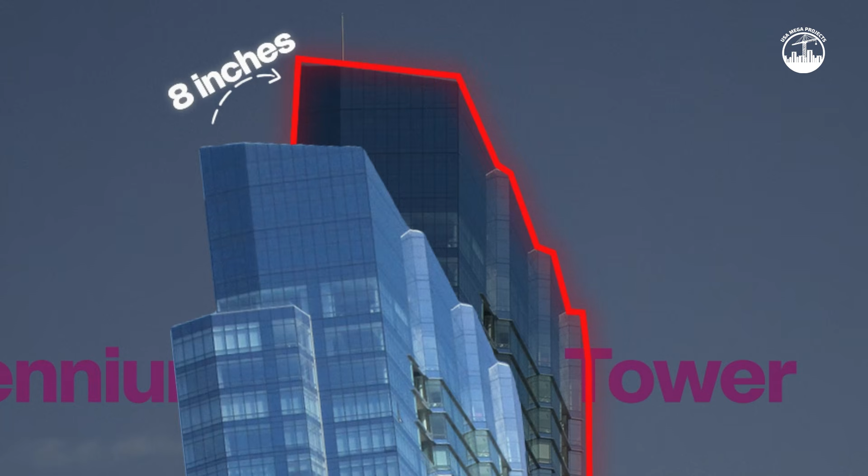Before Millennium Tower was even finished, it had already sunk nearly 8 inches. Not after a storm, not after an earthquake. Before construction was even complete, engineers had predicted 4 to 6 inches of settlement over the building's entire lifetime. It blew past that number before the first resident moved in.

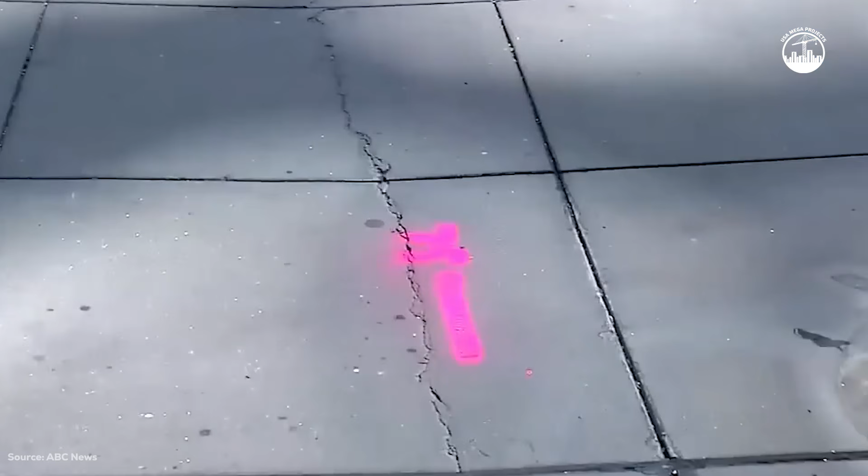58 floors, $350 million, San Francisco's tallest residential tower. And it was sinking faster than anyone wanted to admit. This is the story of the skyscraper San Francisco cannot stop sinking, and the invisible layer of mud nobody saw coming.

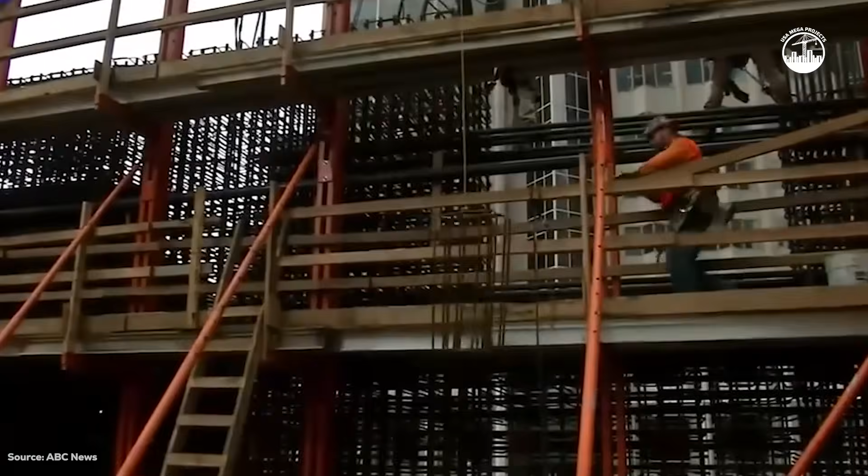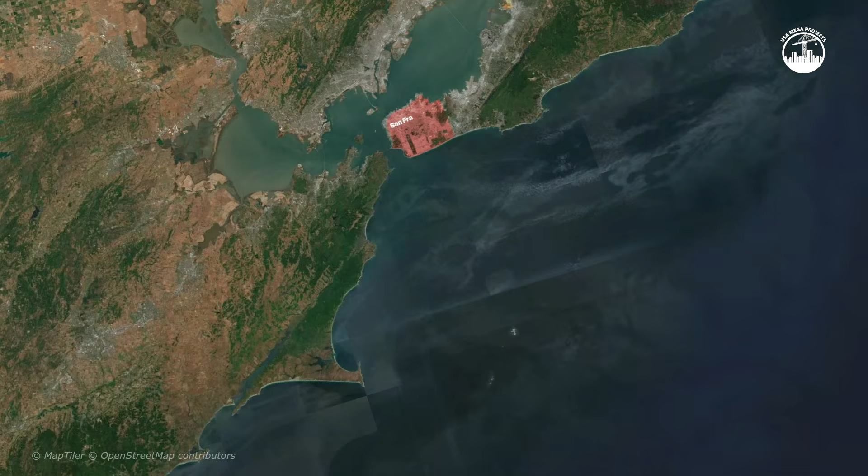When Millennium Tower opened in 2009, it was everything San Francisco wanted to be. The tallest residential building in the city, 301 Mission Street, in the heart of the financial district. Condos started at $1 million. Penthouses sold for $10 million. The building sold out almost immediately. Celebrity buyers, tech executives, even an NFL legend, former 49ers quarterback Joe Montana.

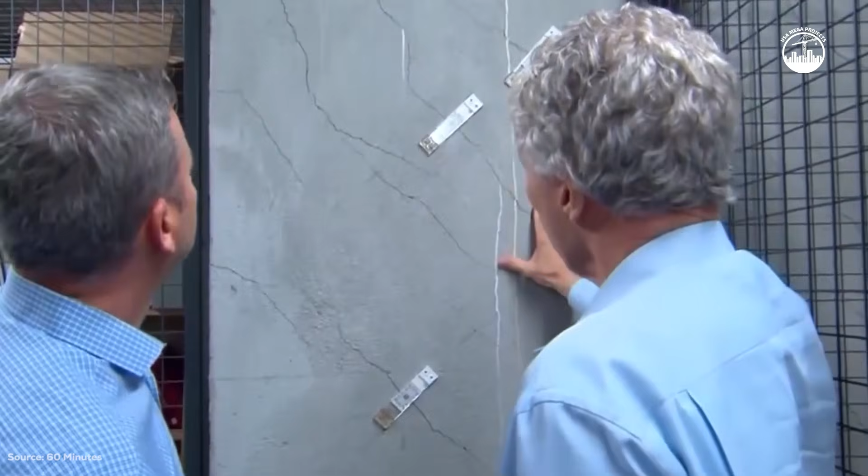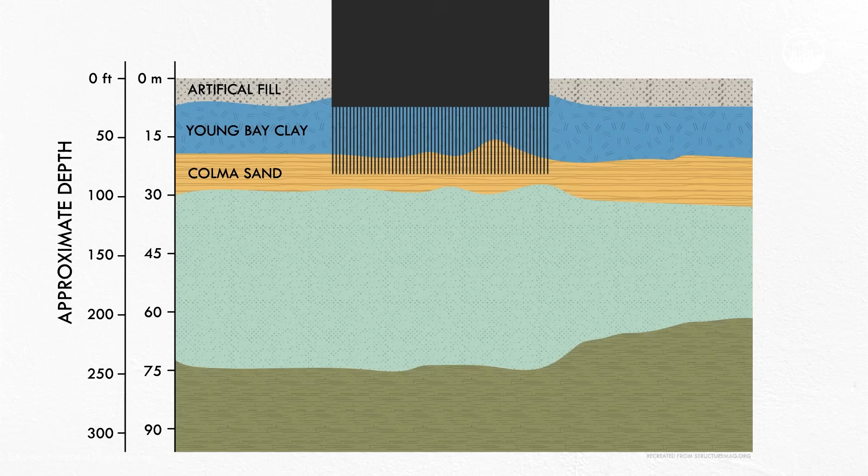This was not just a building. It was a statement. San Francisco was booming, and Millennium Tower was its crown jewel. Nobody knew the crown was already sinking into the ground beneath it. Instead of reaching solid bedrock, engineers stopped nearly 100 feet short. They believed the layers beneath the building could carry the weight on their own. One layer proved them catastrophically wrong.

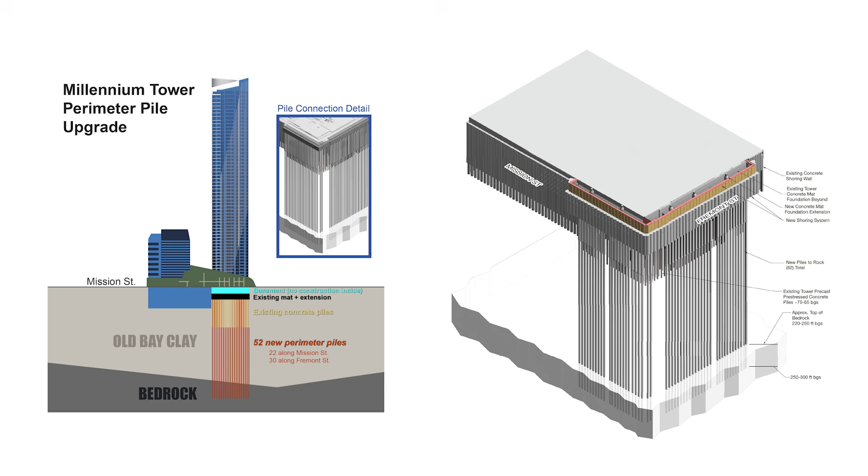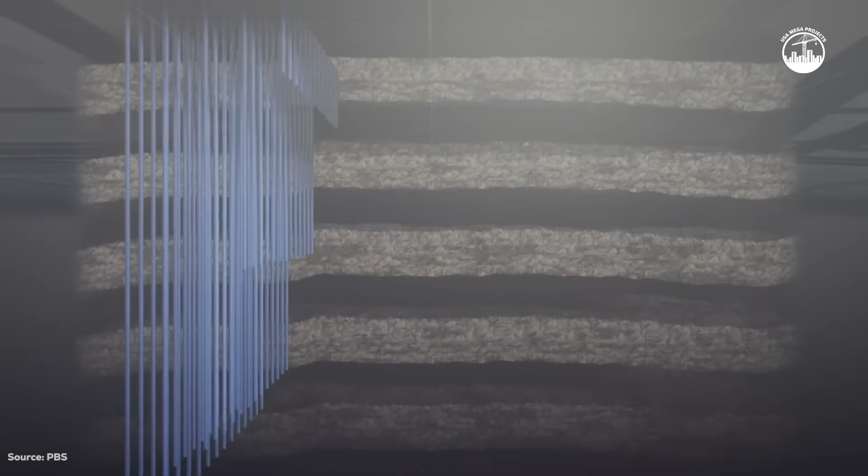Geologists call it the Old Bay clay. Ice Age mud, deposited at the bottom of an ancient bay, compressed over 10,000 years. Engineers built 950 concrete piles into the sand above this clay, never reaching the bedrock far below. The original report predicted the clay would compress slowly, settling the building 4 to 6 inches over its entire lifetime. They were wrong. The design had pushed the clay almost to its breaking point, a threshold where soil stops gently settling and starts collapsing. Any disturbance could tip it over.

By the time construction finished in 2009, the building had already settled nearly 8 inches. For 7 years, the tower kept settling. Outside, almost nobody noticed. By 2016, settlement had reached 16 inches. The building was leaning visibly toward its northwest corner. And here is what residents did not know.

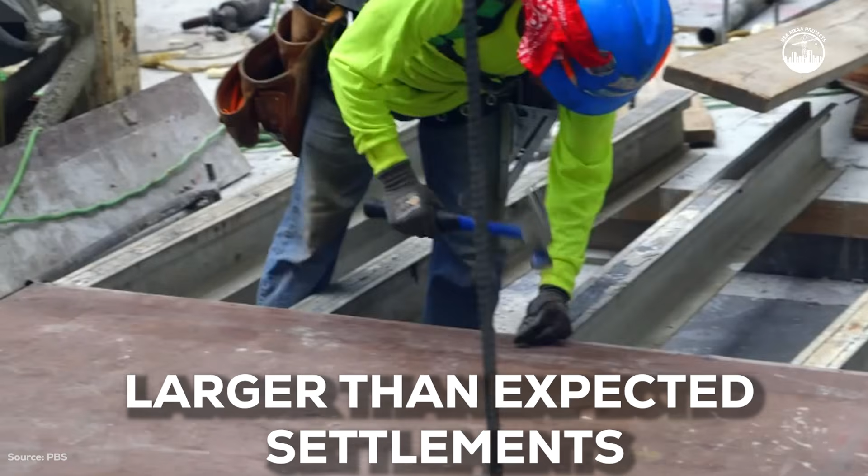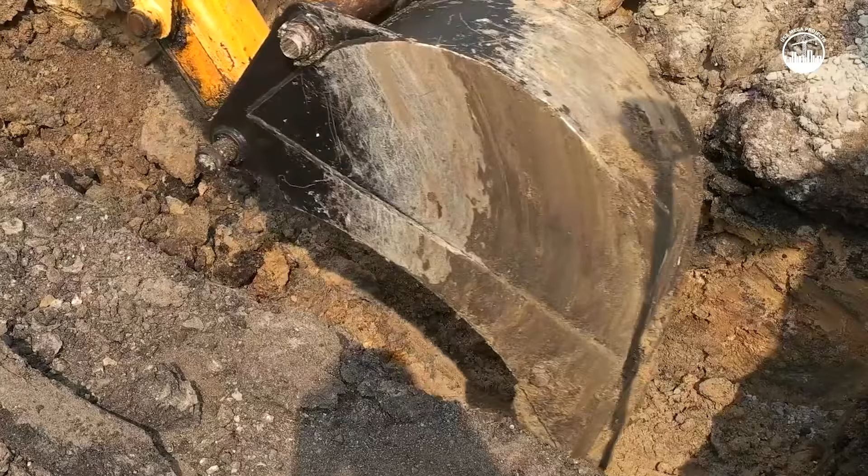Leaked documents later revealed that city building inspectors had raised concerns about larger-than-expected settlements in February 2009. Before the building even opened, both the city and the developer knew something was wrong. Neither made it public. Homeowners found out not from a disclosure, but from a lawsuit. The developer blamed the city, pointing to dewatering from the Salesforce Transit Center built next door. The city blamed the developer for stopping the foundation short of bedrock. A $200 million lawsuit followed.

And here is the question. I want to know what you think in the comments. Building inspectors knew about the sinking in February 2009. The building opened anyway. Nobody told the buyers. Who should be held accountable?

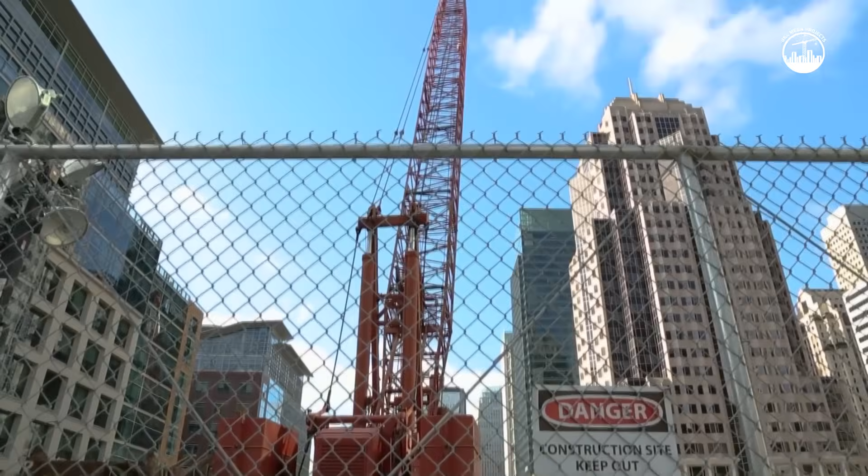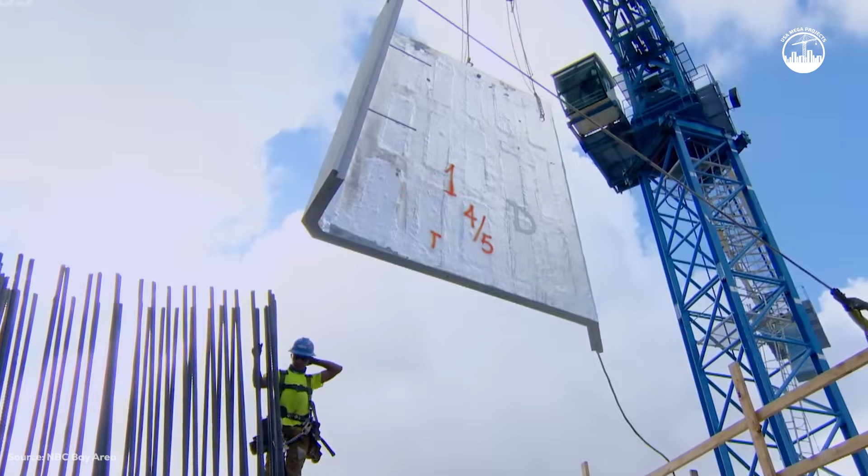In 2018, a plan was announced. 52 new steel piles, driven 250 feet down through the Old Bay clay into bedrock itself. This time, no shortcuts. Construction began in November 2020, and the building sank faster. By August 2021, after 39 of the 52 piles were installed, the foundation settled another inch on one side. At the top of the tower, 58 stories up, that 1 inch translated into nearly 5 inches of additional lean. Construction was halted. The clay that was supposed to be the solution had become the problem all over again.

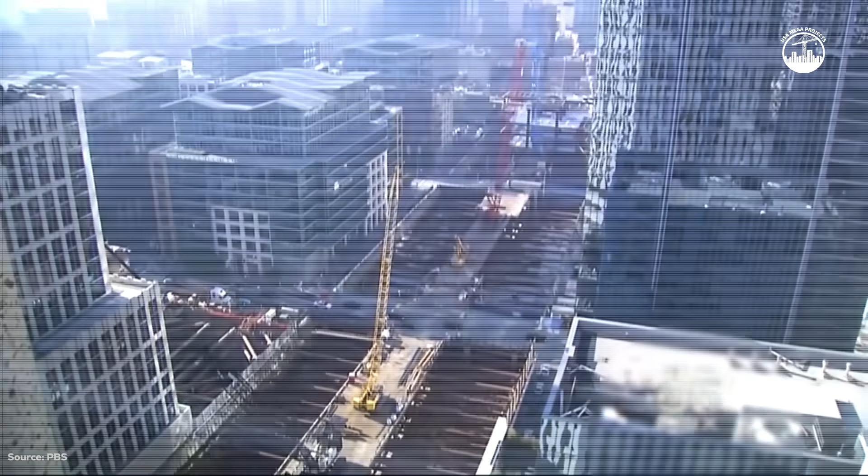Engineers went back to the drawing board, and this time, they got clever. Instead of 52 massive piles drilled through the building's foundation, they designed something smarter. 18 piles, each rated to carry 1 million pounds, drilled outside the building entirely, beneath the sidewalks on Mission and Fremont Streets. The piles were never rigidly attached to the tower. Instead, engineers installed hydraulic jacks between each pile and a new steel beam. Like a bumper jack lifting a flat tire, the jacks slowly transferred 20% of the building's weight off the failing clay and onto solid bedrock.

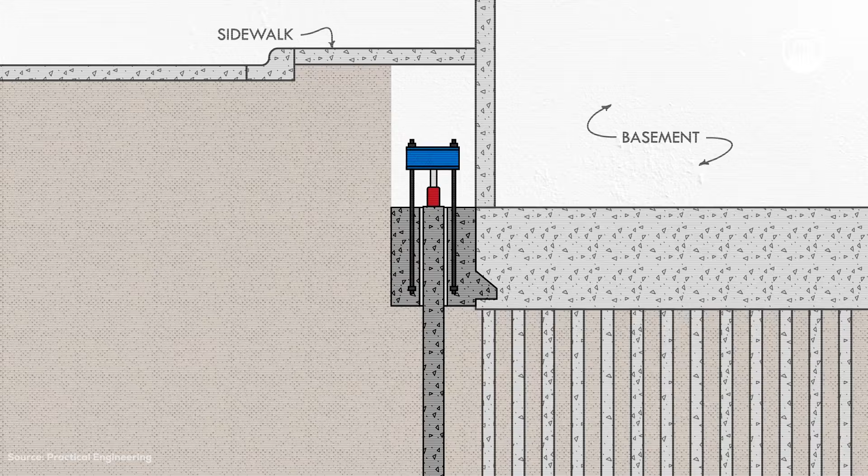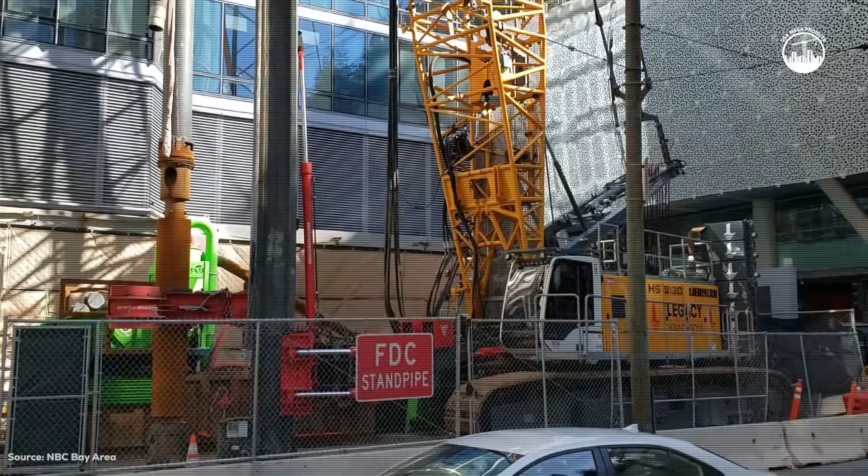Those hydraulic jacks remain there today, still pressurized, still carrying part of the building's weight, a permanent mechanical solution to a geological problem. And here is the detail that shows real respect for what went wrong. The holes around each new pile were deliberately over-drilled, so the piles would never touch the clay again. No new weight, no new disturbance. The lesson had finally been learned.

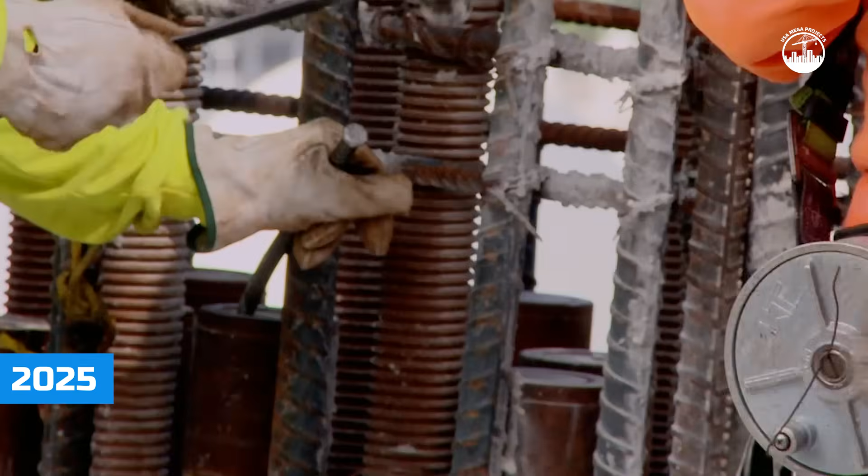After a grueling construction process completed in late 2023, engineers spent more than a year monitoring the building. The sinking had stopped. Then, in 2025, the engineering team behind the project received one of the industry's highest honors. Monitoring confirmed the settlement had stopped. The tower still leans nearly 26 inches at the top. 26 inches does not sound like much, but at the top of a 58-story building, it is enough that residents can feel it in their elevators.

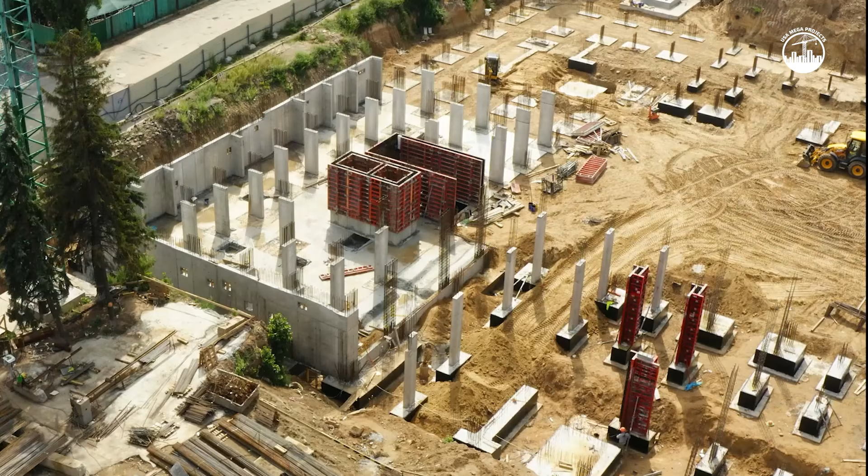For comparison, Italy's Leaning Tower of Pisa leans more than 16 feet. Millennium Tower is nowhere close to that, but Pisa was built on soft ground 800 years ago, before anyone understood soil mechanics. Millennium Tower was built in 2009 with modern engineering, and it still got the ground wrong. The building may be stabilized, but the residents are not.

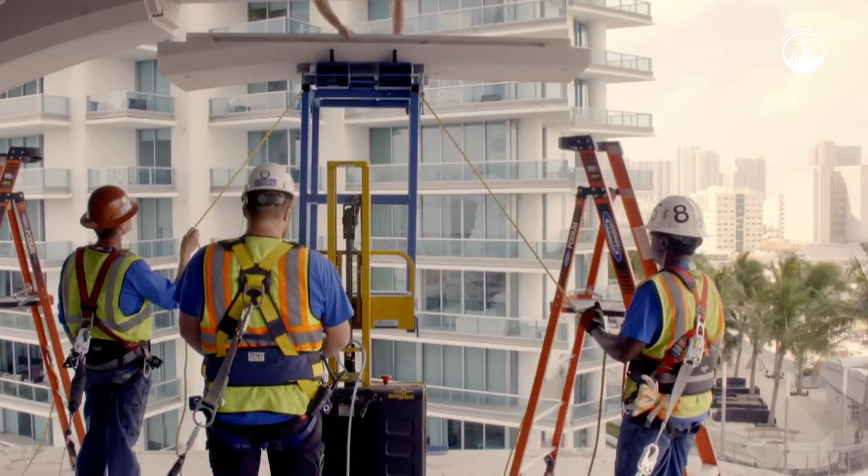Condos that sold for millions in 2009 are now reselling at an average loss of 20%. Some units have sold for more than 50% below their original purchase price. The Wall Street Journal put it simply: the Millennium Tower stopped sinking, but apartment values did not. The total cost of this disaster, construction, retrofit, lawsuits, lost value, has crossed $1.2 billion.

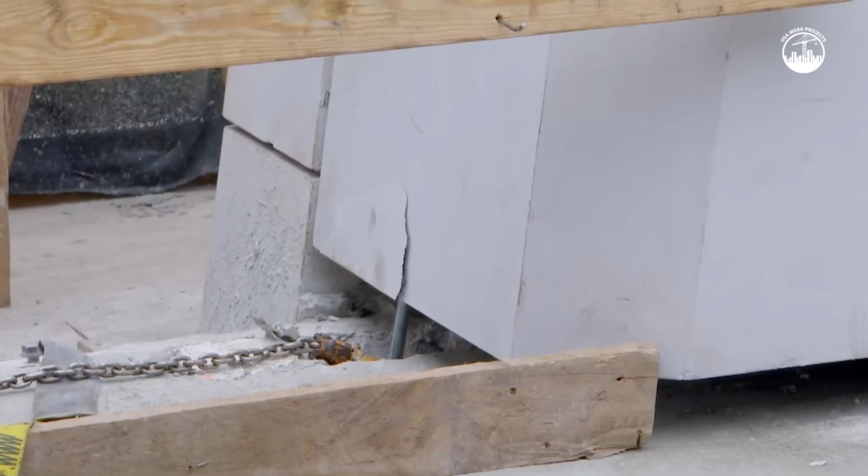For a building still leaning 26 inches off-center, Millennium Tower is not just one building's problem. More than a dozen high-rise buildings in downtown San Francisco sit on the exact same foundation system, piles resting above the same ancient compressing clay. The question is no longer just about one building. The question is, how many more towers are quietly sinking into the same mud right now?

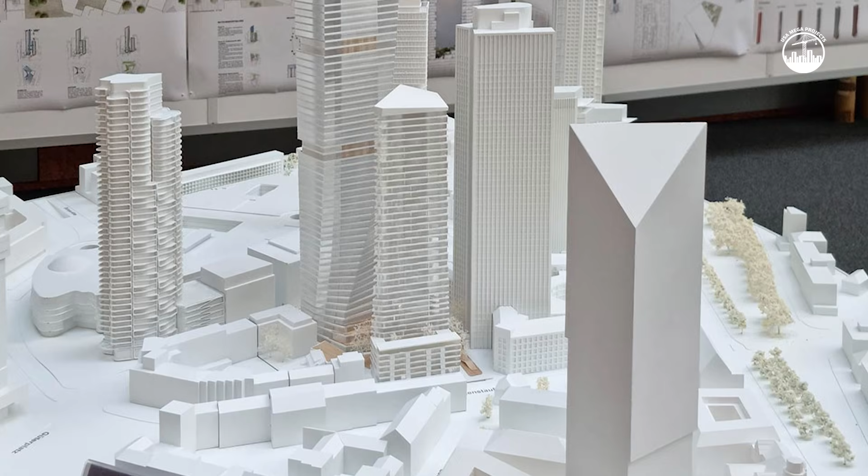In 2025, the engineering team behind the fix received one of the industry's highest honors: Structure of the Year, awarded by the National Council of Structural Engineers Associations. A $1.2 billion mistake that ended in one of the most celebrated engineering solutions in American history. Millennium Tower is more than a sinking skyscraper. It is a warning about ambition outpacing geology. And it is proof that even the most expensive mistakes can sometimes be engineered into brilliant solutions, if you are finally willing to listen to the ground beneath your feet.